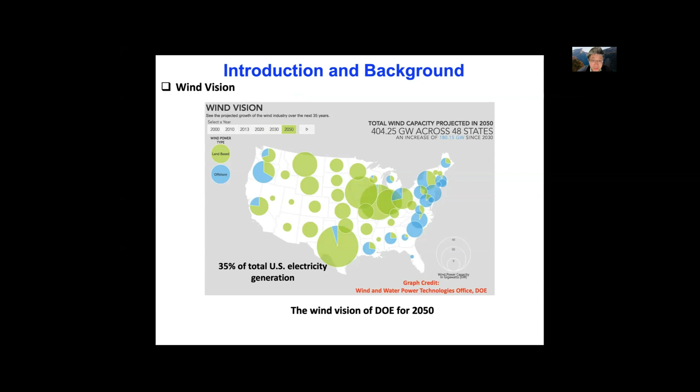From the water side, we are also very promising. Here I extracted some statistics from the DOE report. The length of the US coastline is more than 12,000 miles, and each year the average tide and wave energy is about 2,100 terawatt hours. If we only harness 20% of this amount with 50% conversion efficiency, we would be able to generate 7% of the total US electricity consumption each year.

Another attractive fact about wind and hydro energy is that if you look at the energy distribution and the population distribution in the United States, you would see that they are pretty much overlapped. This means that renewable wind and renewable hydro energy can provide power where we need it, and we can significantly reduce energy waste during electricity transmission by developing these energies.

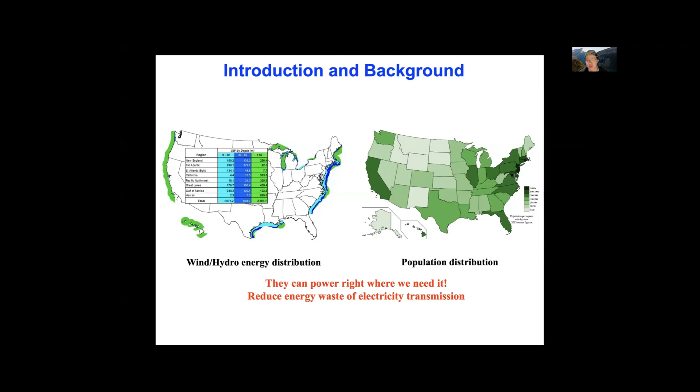If you look at the evolution of wind energy and tidal energy technology development, you will see that the energy harvesting structures are becoming bigger and bigger and more complicated in terms of geometric design and material design. For example, if you take a typical offshore wind turbine, you realize it involves very complex geometry and materials, and the blade diameter can easily reach up to 120 meters. This means the cost of each turbine will be very expensive, and experimental tests are becoming more and more expensive if you want to study their performance and energy generation efficiency.

As a result, high performance computing is becoming indispensable. However, this is very challenging. The first challenge is that the energy harvesting structures are very complicated — they have a very complex shape, they are big, and they have complex distribution of material properties. The structural components are in relative motion, and this gives challenges for CFD and FSI simulation.

The second challenge is that these structures are subject to very complicated loading conditions. Here I use an offshore floating wind turbine as an example. It's subject to gravity, and it's subject to high Reynolds number turbulent wind flows. It's also subject to ocean waves, so you have very strong components of those loading conditions.

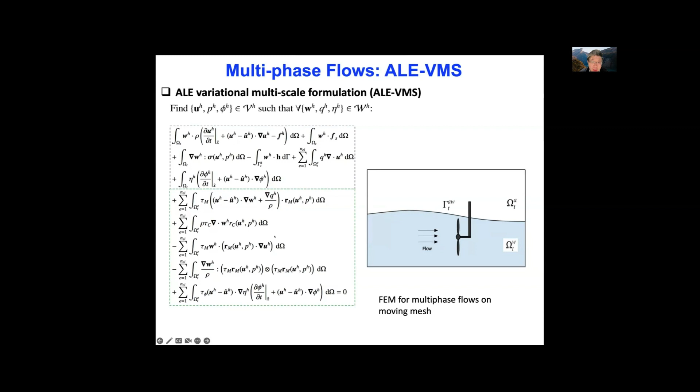First off, for fluid dynamics, we have developed a finite element method formulation for multi-phase flow on moving domains. This approach is based on the Arbitrary Lagrangian-Eulerian approach. In order to solve the multi-phase flow, we couple the Navier-Stokes equations with the level set method such that we can track the air-water interface. Then we use the variational multi-scale formulation as a large eddy simulation model to handle the large Reynolds number turbulence.

And for structural dynamics, we're using a new technology called isogeometric analysis. For some of you, you may know that in structural mechanics or solid mechanics, finite element method dominates this field. However, there is a huge gap between computer-aided design and the finite element method.

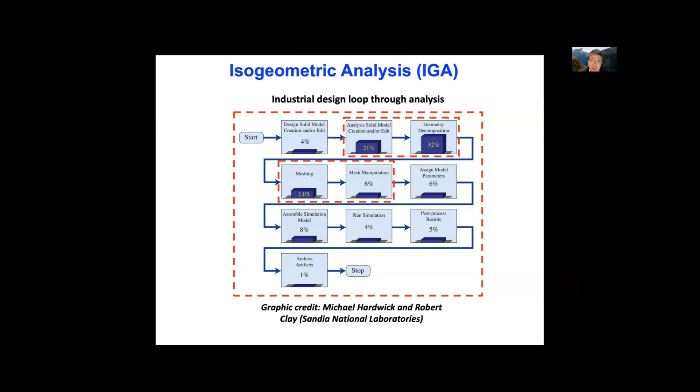In computer-aided design, typically you use non-uniform rational B-splines to represent geometry. However, in FEM, what you typically use is Lagrangian polynomials. As a result, in the industrial structural design loop through analysis, a lot of time is spent converting the CAD model into an FEM mesh that can be handled by finite elements. For very complex structures like wind turbines, this conversion process can take very long, typically accounting for more than 80% of the total design loop through analysis.

So in isogeometric analysis, we feel that we can integrate design and analysis. We employ the same functions used to describe the geometry of the turbine and directly use them in the structural analysis. This example shows how we use isogeometric analysis to do design, structural analysis, and visualization. During the process, no mesh generation is needed. We directly use the non-uniform rational B-spline representation for design, analysis, and visualization. And we coupled isogeometric analysis for structural mechanics with multi-phase CFD in order to do fluid and structural interaction analysis.

So let me show you what you can do with this computational fluid and structural interaction framework. These are just several case studies. First of all, you can use the framework to study the interference between turbines in a wind farm.

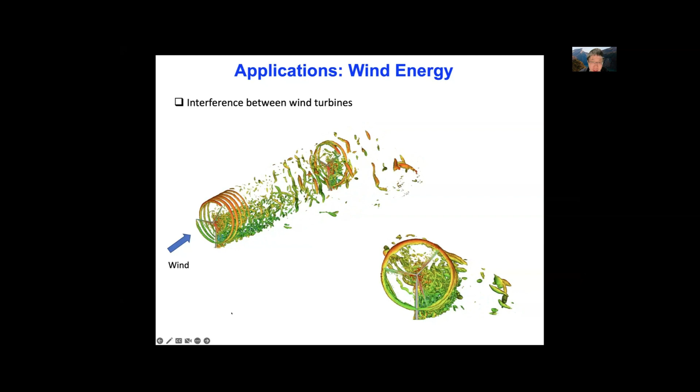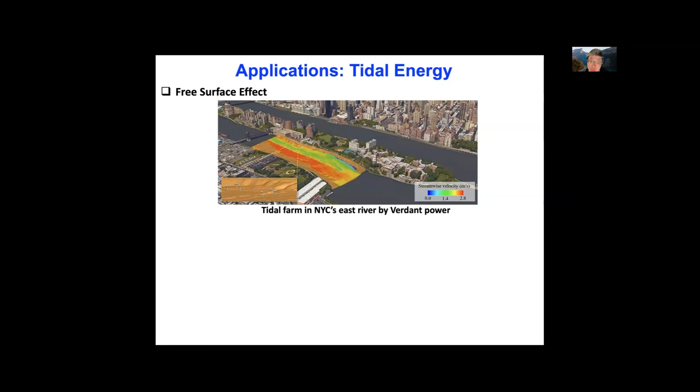We can also use this framework to study hydro turbines. One important issue in tidal energy is the free surface effect, because typically you install turbines in shallow waters in rivers. Many experiments have indicated that free surface has a significant impact on tidal turbine performance. However, few people had studied this. So in 2016, we did the first study of the free surface effect on tidal turbine performance.

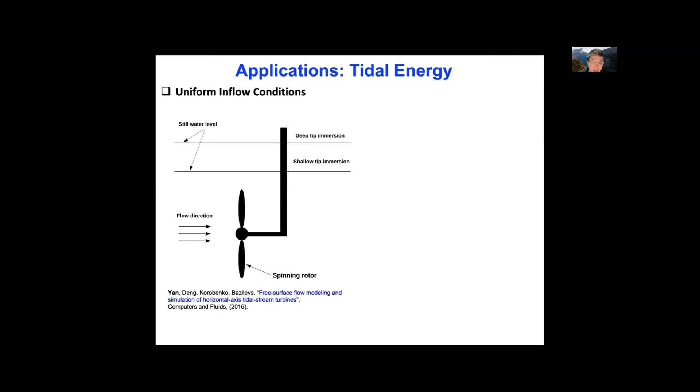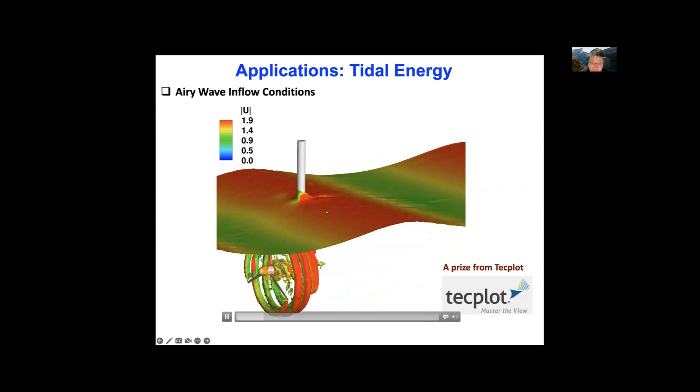In addition to uniform inflow, you can add waves. This is a free surface simulation of this tidal turbine subject to Airy wave inflow conditions. You can see the interaction between the turbine and the free surface flow, how the free surface deforms, and how it interacts with the tip vortex due to the rotation of the rotor. This visualization won a prize from Tecplot in 2017.

Because you have waves, the thrust coefficient and power coefficient experience very strong fluctuations. However, if you average the coefficients in the fully developed stage, you still see that as you immerse the turbine deeper, the coefficients increase. This indicates that for both uniform inflow and Airy wave inflow conditions, free surface has a negative effect on tidal turbine performance.

This conclusion is not surprising. However, you have to quantify it. What about turbine performance in terms of realistic wave conditions? In order to investigate the free surface effect in those scenarios, you have to perform rigorous calculations.

Before I end my presentation, I want to highlight one more application. So we already know, based on my previous calculation, that for the uniform inflow deep immersion case, free surface doesn't have an effect on a single turbine configuration. Here we want to know, for the deep immersion case, if we have multiple turbines, does the free surface still have an effect?

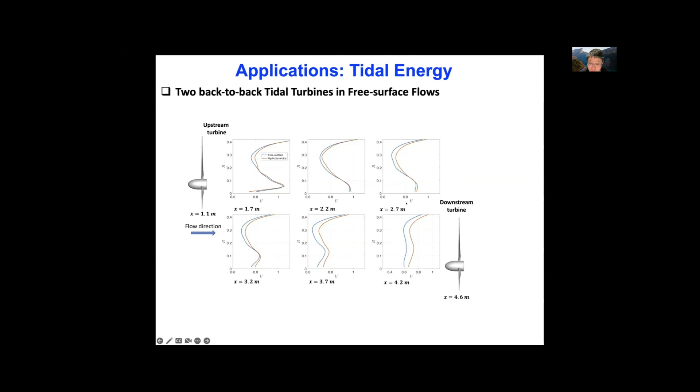However, for the downstream turbine, because of the free surface and tip vortex interaction, free surface starts to have a significant effect, because the water speed predicted by pure hydrodynamics is significantly bigger. As a result, the power coefficient and thrust coefficient predicted by pure hydrodynamic simulation are also bigger than those of the free surface flow simulation.

So with this, I will stop my presentation.

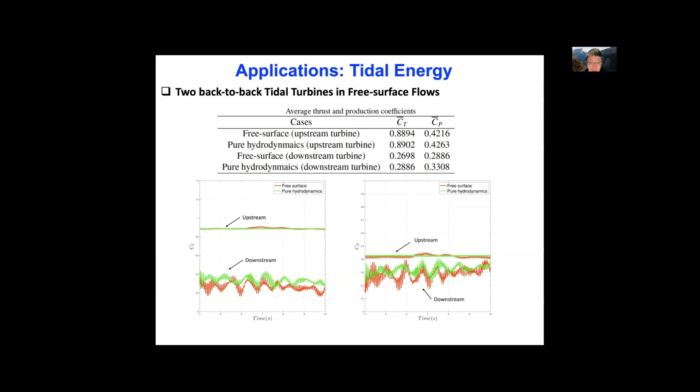Sure. I see the CP reach almost the theoretical limit in the slide before. Is that because it's just transient, or? You mean this one, this slide? No, the previous one. This one? No, next one. Next one, this one? That one. Oh no, some of that. Yes, this one — you see at time 0.7 you almost reach the theoretical limit.

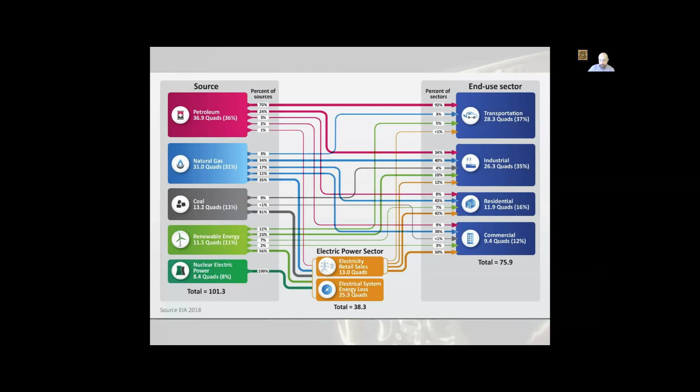About 38% of all the energy we are able to generate, we lose, either during transportation or during storage. We really need, if we are going to have a more efficient world in terms of energy, to keep an eye on how to save energy. And that starts in our house.

That means that we need to spend a lot of effort, money, and resources on air conditioning. This shows that there is a very big increase in electricity demand for air conditioning. Keeping fresh a house, a school, an office is mandatory in many places around the world, either to keep it cool or keep it warm, depending on the season of the year.

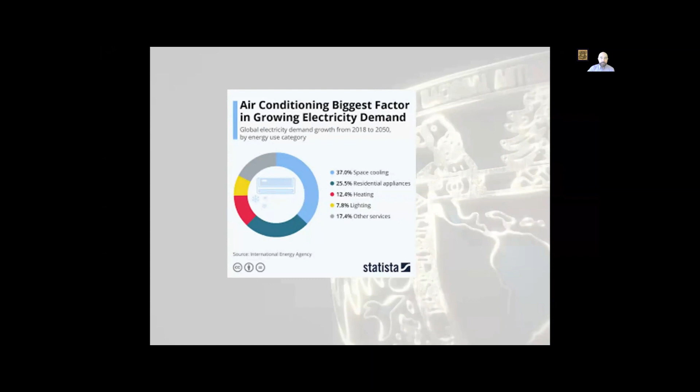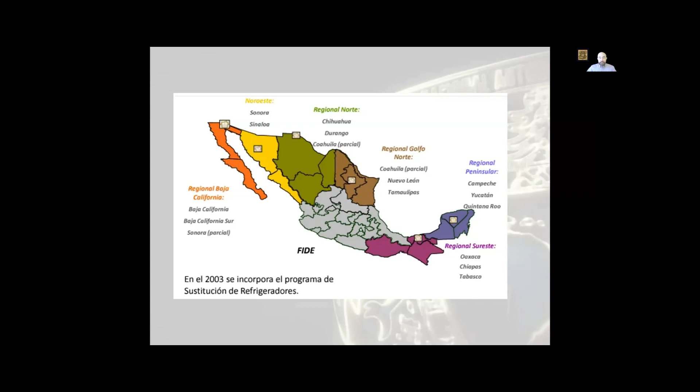We already have patents in the United States and in Mexico, and we have a program with a federal agency called FIPATERM, which is a fund for thermally insulating houses all over Mexico. They operate in the hottest, warmest areas of the country: the northern part near the border with the United States, and the southern part, areas which right now can reach up to 40 degrees Celsius every day.

The other thing I'd like to tell you about is that, as you know, the solar energy market is one of the fastest growing in the world, as you can see here in different regions: Europe, North America, China, the Middle East, and so on and so forth.

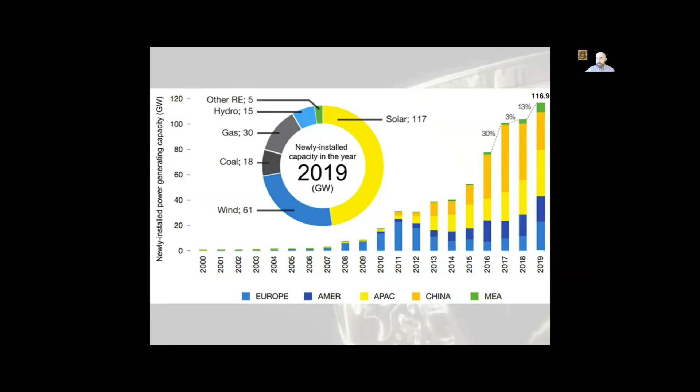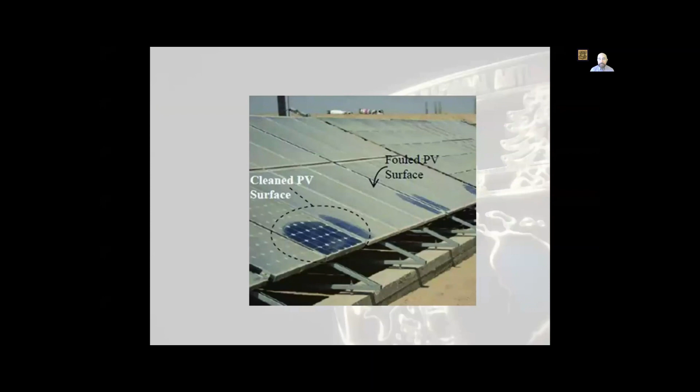This means that once you install a solar cell, within a few months it gets covered with dirt, and the efficiency decreases very dramatically. This is a review on how solar panels lose power due to soiling, and this could be up to 50% in less than a year. So this is a very big problem.

You could say, okay, we can just clean it. But in some areas in Mexico, they have found that it's cheaper to put up new solar panels than to clean them. In order to solve this, what we did was develop a nanotechnology coating which is self-cleaning.

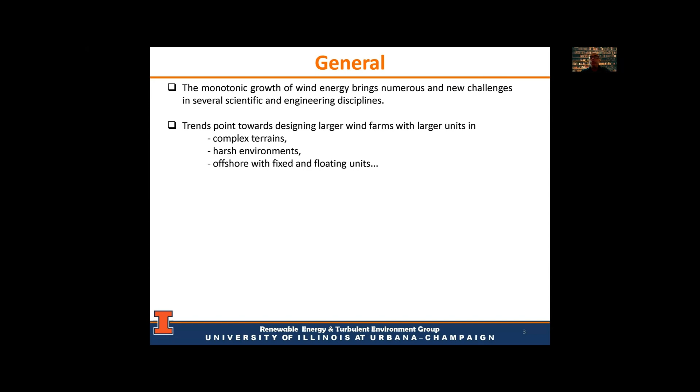In general, we are having larger and larger wind turbines and wind farms, with many new challenges from scientific and engineering disciplines. Trends point towards setting these units in complex terrains, harsh environments, and offshore environments with fixed and floating units.

We need to understand the role of the atmospheric boundary layer within wind farms at different scales, the flow structure interaction—particularly in floating offshore units—meteorological effects, wave dynamics, turbine-turbine communications, and the aerodynamic loads, especially for those monster turbines that are now 5 to 10 megawatts, the larger, very huge wind turbines.

Okay, so the common approaches from the measurement standpoint: we have laboratory experiments and field campaigns. In laboratory experiments, we have many advantages, which include control setups, repeatability, and cost usually is an advantage. We can get scientific value, we can do optimization, and we can couple different effects like topography, flow, and turbine interaction.

But there are many disadvantages as well in laboratory experiments. We have to ask, is the model representation of the system representative of the field scale? So we have scaling issues. We have limited aerodynamic loads, and cost is an advantage but could also be a disadvantage. Usually the blade scale aerodynamics is pretty limited, and the Reynolds number is much lower than what we see in full scale settings. So those are examples of laboratory experiments.

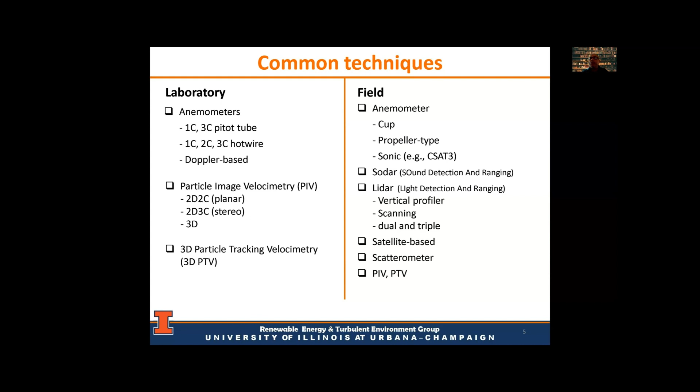In the field, however, we have complementary tools. Most common are anemometers—single point, cup propeller type, sonic anemometer. We have Sodar, LiDAR in different variations: vertical profile scanning, dual and triple scanning. We have satellite-based measurements, scatterometer, and we can do particle image velocimetry at super large scale. But we need to see the flow. That is pretty challenging, but conceptually is possible.

So we have considerations between laboratory and field scale. We have to account for, evaluate, and assess what temporal and spatial resolution we need to achieve for a particular project or development, as well as accuracy and range. So let's see a little bit.

So at the field scale, what we want, what we need, is to get mean flow, mean velocity. We want to get higher order statistics, let's say second order statistics, to assess flow variability, the variance. And then hopefully we would like to know how scales interact—scale to scale interaction. So we would like to assess and capture the turbulence dynamics, the structure of the turbulence.

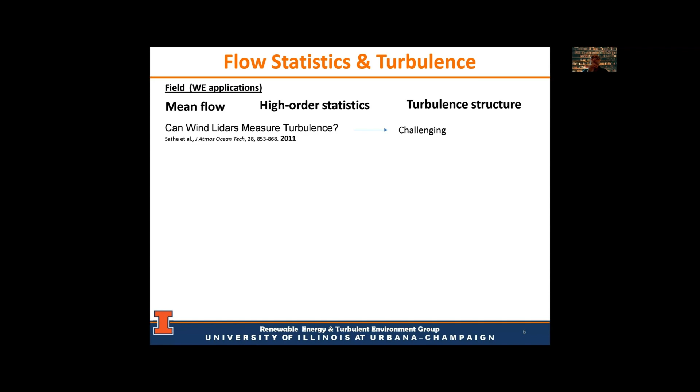So what do we have? Can we measure mean flow? Yes, anemometers can measure that. But can we measure turbulence? Well, a review paper from over 10 years ago shows progress, but it's slow. A gold standard technique is LiDAR. Can LiDAR measure turbulence? Up to some extent. It is challenging to get very accurate data.

And can we use other techniques? Yes, we can use other techniques, and recent studies show that we are approaching being able to estimate just the second order statistic in a reasonable way.

So in general, for field scale, we can measure mean flow. We are doing substantial progress in getting higher order statistics towards measuring velocity fluctuations. But in describing the turbulence structure, we need more research and development. It's still a question mark at field scale.

On the other hand, at laboratory scale, we can measure mean flow, we can measure higher order statistics, and we also can measure the turbulence structure. However, we are bounded by scaling in laboratory settings. We are bounded by that.

So let's discuss a little bit about this scaling issue at laboratory scale. Several years ago, we showed that at laboratory scale, the representation of wind turbine aerodynamics and wakes—not the wind turbine blade, but the wakes of the wind turbines and turbine-turbine interaction—becomes Reynolds independent at values that are representative and possible at laboratory settings. So we have that without problem, we can do that, it's representative. And also a study by Wong et al.

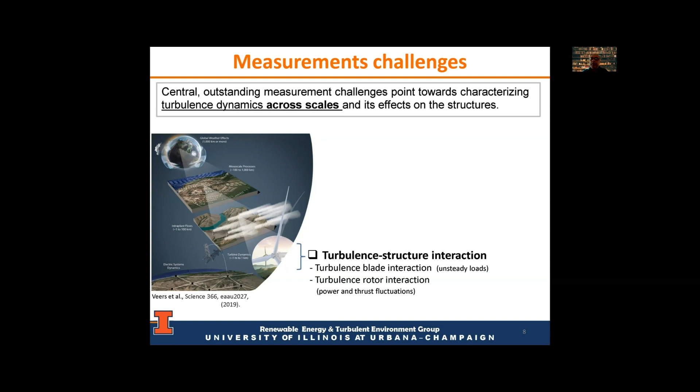Those are at small scale, particularly very relevant to characterize. Then at larger scale, we have to account for turbine-turbine interaction, to understand, to quantify, to model, and to reduce unsteady loading.

And allow advanced controls. Also, when you have wind farms, we need to understand this inner-outer flow interaction to replenish turbulent energy within the wind farm.

And also, of course, to control the turbine wakes.

And then at a very large scale, at meteorological scale, we need measurements as well, because we want to assess what are the local effects.

In the sense of topographic effects, sea effects, local weather effects, and air-sea interaction.

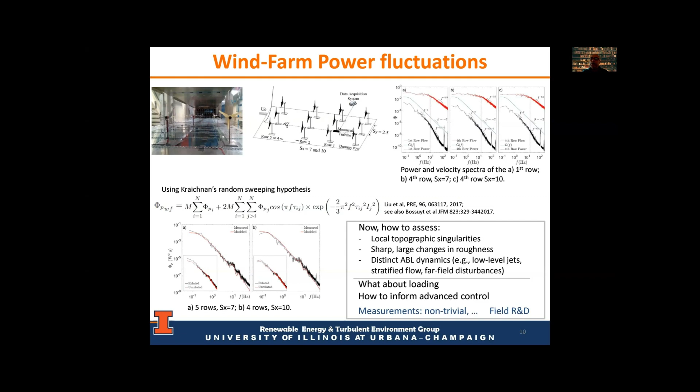We can complement these models with measurements and then evaluate them. And then, what we have recently done is explore offshore topography and turbine-turbine interaction. Thank you.

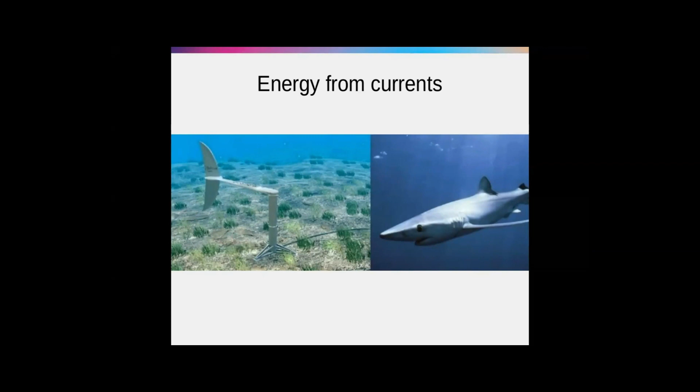So using this principle, we can think of devices, maybe inspired by nature, that can extract energy from a fluid, from a current. There are passive devices that transform the oscillating motion into rotary motion using mechanisms like this one.

I'm showing here. There are others that use, for example, a single airfoil like this one, which is rather big, as you can see from the picture.

I have to say that most of these efficiencies, in the case of experimental and also numerical studies, are obtained with tandem configurations, which means that there is more than one airfoil.

There are two notes I want to tell you about here. One is that most of the numerical studies are done with prescribed kinematics. Prescribed kinematics means that we move the airfoil in the simulation the way we want. Most people use a sinusoidal trajectory, both in heaving and rotational motion of the airfoil, and then calculate the efficiency with the forces and the velocity.

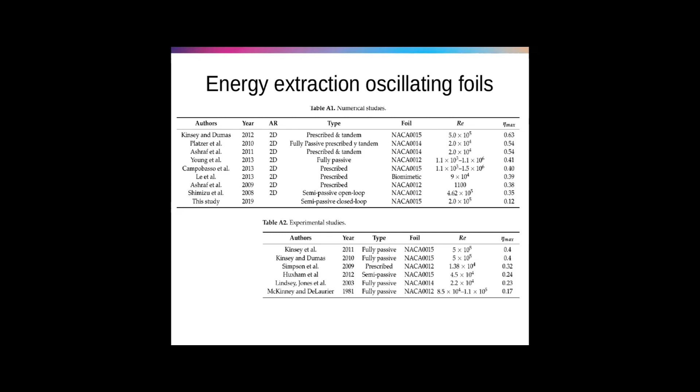It's facing the flow with an angle of attack theta. This angle of attack will produce a lift force that will drive the airfoil up and down, and we will be able to extract energy with a generator, which can be modeled, in the simplest way, through a damper.

The angle of attack can be changed using an actuator, a torque applied at the center of rotation of the airfoil, maybe through a motor or some actuator. This scheme is supervised with some measurement. For example, we can measure the angle theta and the velocity, and this supervising system will tell us if we are doing the extraction correctly, and if we are not, then we can correct the motion by actuating through the torque. So this is a closed loop controlled system.

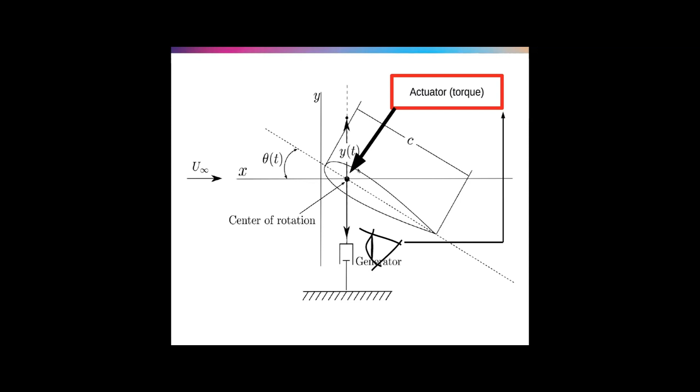Here, the airfoil will be moving according to Newton's second law of motion. So we are considering here the fluid structure interaction.

We have to take into account that this thing is moving up and down, and the relative angle with respect to the flow will vary, but that calculation can be done very easily, so that's not a problem. So Newton's second law of motion will give us the equations that model this interaction. Here we can see that mass times the acceleration equals the summation of forces. Same thing with the torques and the angular motion, where instead of mass, we have the moment of inertia.

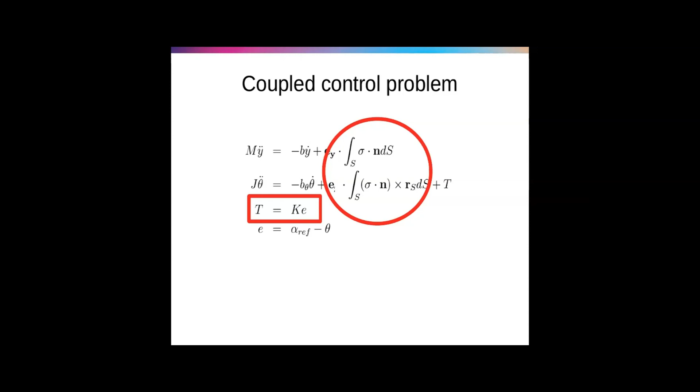Okay, so how did we do it?

We carried out 2D simulations using an open source code called OpenFOAM, which allowed us to modify the code and carry out the closed loop controller, which was a proportional controller, the simplest controller we could think of as a first approximation.

OpenFOAM can have deformable meshes, and this characteristic allowed us to move the airfoil the way we wanted, up and down, and modify the angle of the airfoil. Note that the resolution of the mesh must be very fine near the surface of the airfoil.

So important variables, there are many important variables here: the fluid characteristics, rho, mu, viscosity, the density, the mass of the airfoil, the moment of inertia, and that results in 8 dimensionless variables. So this is a very complex problem.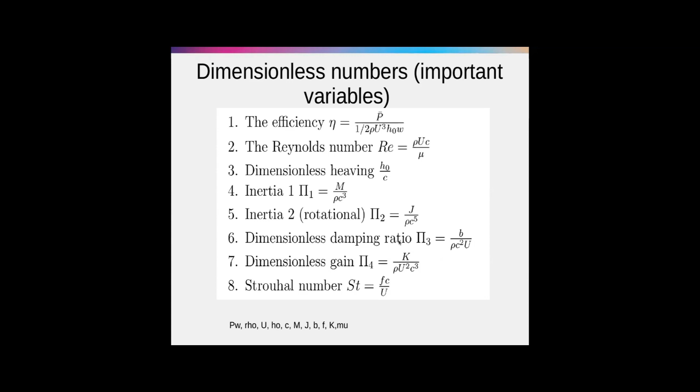Some of these dimensionless numbers: the efficiency, the Reynolds number, a dimensionless heaving where h0 is, let's say, the maximum distance we go up or down, the range, an inertia number, a rotational inertia number, damping ratio, and this number which represents the gain of the controller.

So we can calculate the efficiency, which in this case we plotted against another dimensionless number that represents the force of the generator divided by the force of the actuator, which is represented by the gain K. So if the generator is too stiff, this torque would be very high, and maybe it could move very slowly, so that could affect the efficiency, and vice versa. So there's a commitment we have to make.

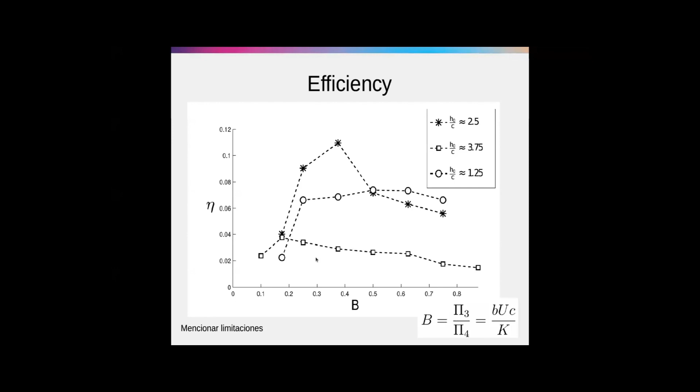We did many tests with different dimensionless heaving ranges, and we obtained efficiencies of the order of 10%. For example, here we see a maximum. We plot the efficiency in terms of these new dimensionless variables.

So the lessons we learn are, well, there are many lessons. I would consider other configurations or improvements, like a passive turnaround of the foil at the end of the range, which would save a lot of energy. Control energy can be large in those parts of the cycle. The deforming mesh has many limits, and the most important thing is that the lift coefficient and torque coefficient are very complex.

Time. Oops, sorry. So let's wrap up now. Yes, I'll wrap up very quickly.

So the lift coefficient and the torque coefficient have to be very well estimated in order to have a good control law. In fact, they show hysteresis cycles. They are very non-linear. So our efforts are now on estimating correctly these coefficients in order to propose better closed loop control laws and obtain better efficiencies, and optimize here.

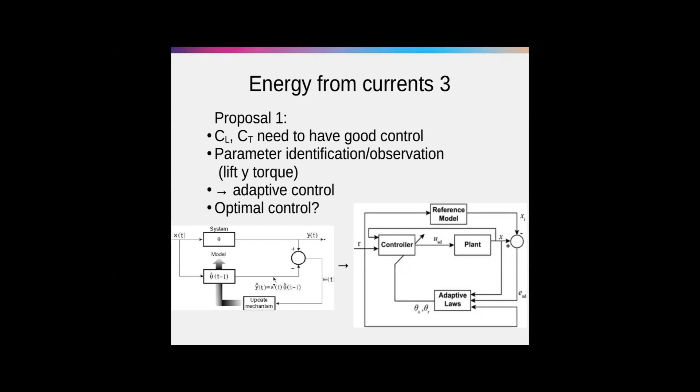I wrap up here, and I'll leave you with this. Thank you very much.

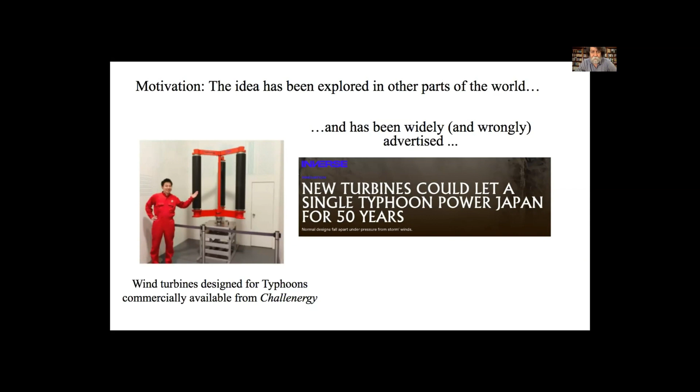And as usual in the media, you can have spectacular comments on this. For instance, they say that a single typhoon, as they call it in Japan, can give the energy for 50 years. That's a crazy and very inaccurate statement.

Let's try to analyze a little bit from the scientific point of view. What are the real possibilities? What are the real conditions under which we can extract energy from hurricanes?

Okay, well, first of all, what is a hurricane? Essentially, a hurricane is a consequence of the thermodynamic disequilibrium between the atmosphere and the ocean. And a typical scale of a hurricane is...

A typical scale of a hurricane is about 1,000 kilometers across, and it has an azimuthal velocity, as we have seen, of about 60 meters per second, even though up to 80 meters per second have been recorded.

Now, this is a big statement. This air velocity is huge, but if we take a closer look at the structure of the hurricane, we will discover that this is not so simple. Essentially, the structure of a hurricane is an upward stream of air that goes up all the way to the stratosphere, and then it comes down, exchanging energy by taking heat energy from the ocean and releasing it in the upper parts of the atmosphere.

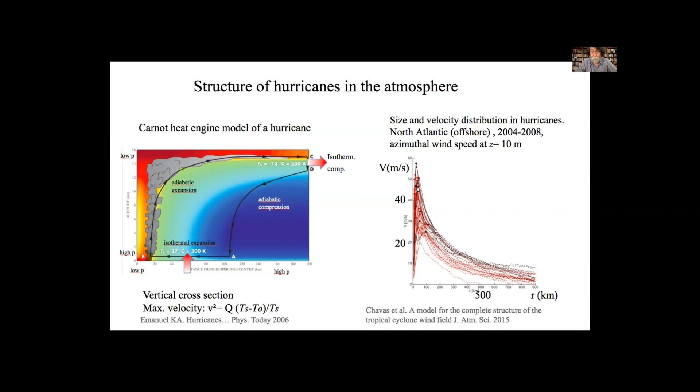Now, the azimuthal energy, the energy from the azimuthal motion, is concentrated in a region that is very close to the upward going current, and it does indeed reach very high values, 40 meters per second, but it is concentrated in a region that is about 100 kilometers. So, of the whole structure, there is only a very limited region where the density of the energy is high.

Let me just mention that if we consider the whole energy of the hurricane, it would be very interesting because it is comparable to the energy powering Mexico's power consumption. But again, let's look at the possibilities of efficiently collecting the energy of hurricanes on land.

First of all, we're going to explore three possibilities. First, let's explore whether we can catch the energy on land. Well, first of all, if we want to catch the energy from a hurricane, assuming that we are on land, one of the difficulties—let me talk about this a little bit in detail.

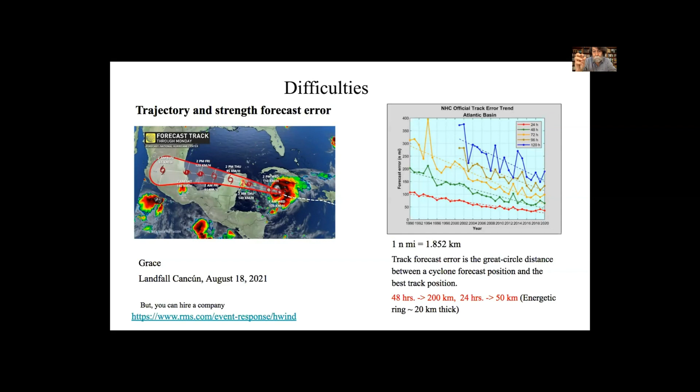One of the most important difficulties is that we don't really know where the hurricane is going to go. For instance, I remind you that the trajectory of a hurricane from the weather services is a trajectory that widens as it goes into the future. So we don't really know where it is going to land. So if we wanted to catch the hurricane on land, we would have to be running around using presumably roads or rail tracks to actually go to the place where the energy is.

This is not the only difficulty. We also have the problem that we don't actually know what is the strength of the hurricane. And even if we are lucky enough to be in the right place at the right time, we will have to solve the problem of energy storage, because the hurricane is very short-lived—about 16 hours. So we will have to be very careful in storing the energy very, very efficiently.

Okay, even though this will be very difficult, there will be many challenges. Nevertheless, as I commented before, there is technology that has been developed by a company, Challenergy in Japan, and they claim that their device has been able to catch the energy of a typhoon, about 30 meters per second wind. But it's very expensive. If you want to try your luck, you're welcome to buy one of those for $250,000 US dollars.

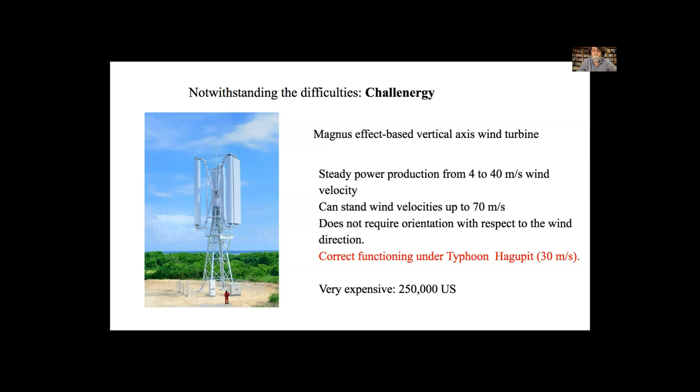And also, as we said, you will have to be running around to catch the energy. Now, what happens if, instead of being on land, we are on the sea, in particular in the Gulf of Mexico? This would be a very interesting idea because if we talk not only about hurricanes, but also all the tropical depressions that occur on sea, then we have a much more numerous possibilities. Just to give you an idea, I'm showing you the different trajectories here in the nearby region of the peninsula of Yucatan.

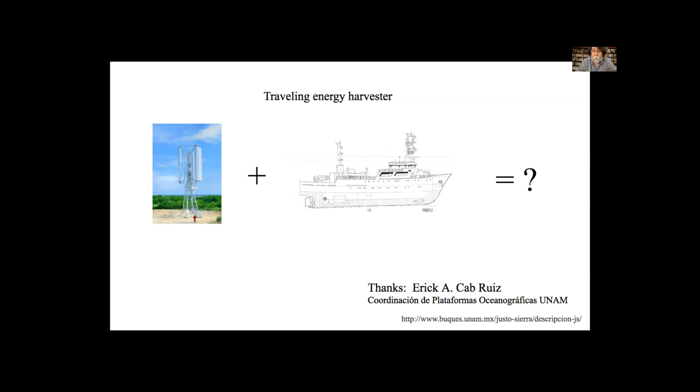Now, how do we catch the hurricane energy on land? What happens if we take a very robust wind turbine and put it on a boat, just to run around and try to catch the energy? Well, this is not such an outlandish idea. There are some companies that actually build structures very similar to the ones needed, based on the Magnus effect, on ships. So this would be interesting, and let's see whether we can fulfill the conditions.

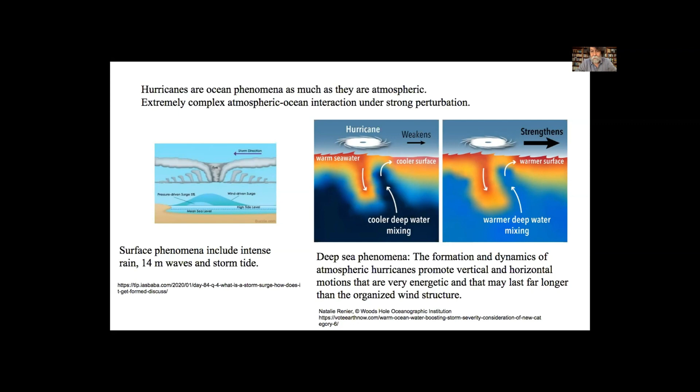Now, since we are on the sea, perhaps we can also try to get energy not from the air, from the wind, but also from the currents generated by the hurricanes. This is an enormous source of energy, and what we're thinking right now is that this would be the best way to go, to try to extract energy from the atmosphere and from the ocean in the passing of the hurricane. Also, thermal energy, which I haven't had time to talk about, is available.

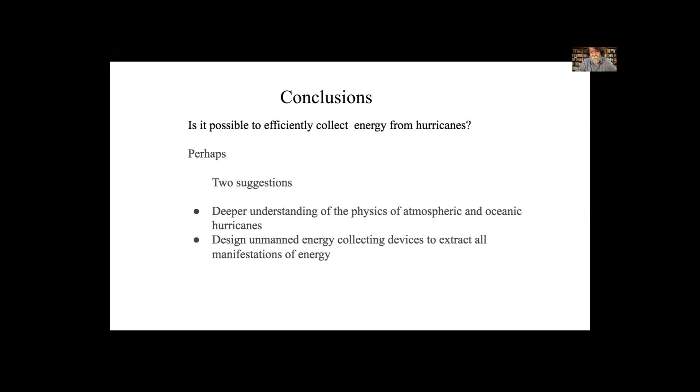Good. My conclusions are: let's try to answer this question: is it possible or feasible to efficiently collect energy from hurricanes? The answer is perhaps. Our study indicates that we need a deeper understanding of the physics of the atmosphere and ocean, and also we have to design an unmanned collecting device to extract all manifestations of energy. And this is the end.

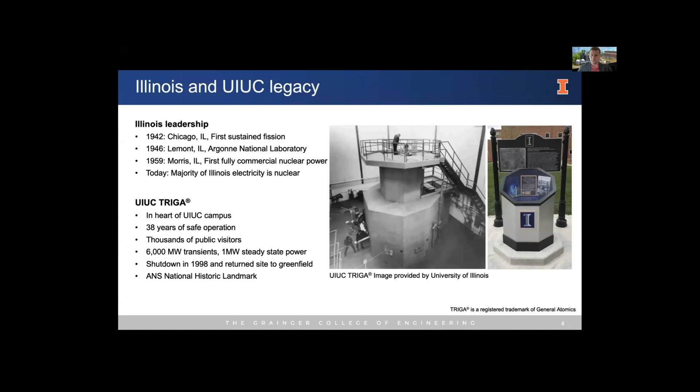So we're planning on leveraging Illinois' leadership in nuclear, the University of Illinois' experience with nuclear. A lot of folks who were here for the TRIGA reactor are still involved. And so this gets to the Illinois Microreactor Demonstration Project, which is what I work on every day.

As part of our project to deploy a microreactor on campus, we have two core missions and a cross-cutting mission. As a university, one of our chief missions is going to be education, training, and engagement.

So education is using this as a teaching aid. We want to train reactor operators, which—as this will be a commercial unit—we'll be able to do. We're also very actively looking at cross-training.

So in the future, if carbon reduction continues with the momentum it has, and even picks up momentum, we'll be looking at displacing coal and natural gas plants, where a lot of very skilled people work. We're looking at how we can leverage that, keep those people employed, and also maintain that experience with as little retraining as possible.

The other core mission is research and development. The paradigm of nuclear has to shift for us to be able to operate more flexibly in the more diverse grid of the future, and to realize some of the business plans that are proposed. We will be in a unique position to perform that research and development.

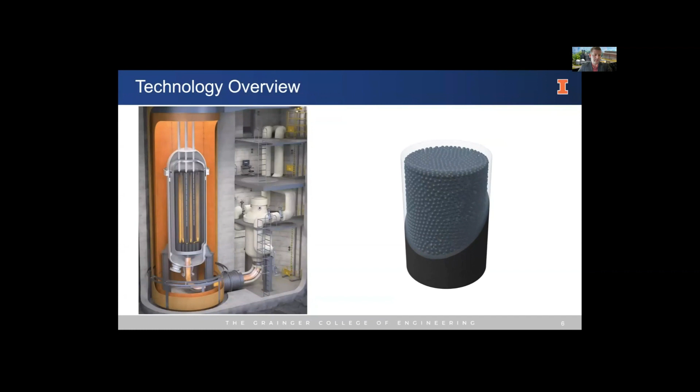The geometry of the core can be shown over here, where it's basically solid blocks of graphite with small fuel elements embedded. And you go to smaller scales—the point of this, without going into too much technical detail, is that as you're looking at the macroscopic core, you're looking at many barriers of protection that keep the radioactive material from entering the environment.

So this has been designed on decades of experience on how to keep reactors as safe as possible.

As part of our forward-looking research, we're looking at how to operate these things more efficiently, how to use fewer operators without compromising safety, and how to exploit other addressable markets.

I pulled this particular example because of the context of this talk. Renewables are clearly a growing part of the energy portfolio everywhere, and people are aggressively looking to expand it.

I see new neighbors every day putting up solar panels, which I'm very excited to see. We have solar farms nearby, wind farms nearby. It's very exciting, and nuclear has an opportunity to be a part of this and provide some critical grid stability without increasing carbon emissions.

We're looking at how we can design the operational paradigms to enable that. Storage is a critical piece of that.

The University of Illinois campus has a very diverse grid in terms of both energy users—we use a lot of steam, a lot of electricity, we have supercomputers—and a diverse energy generation portfolio. We have Abbott, which is a fossil fuel plant.

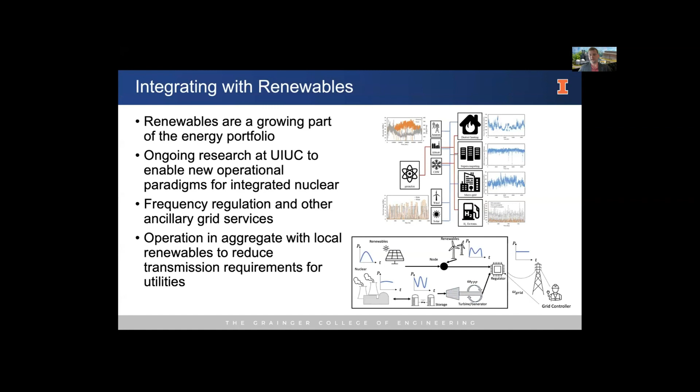We also have on-site solar farms, and we have a wind power purchase agreement. So we have a mix, and we have a lot of data on all of these sources and demands that we are using to develop operational models. I'll wrap up there.

The thoughts I'll leave you with: this is an exciting time in nuclear. We see that there's a really unique opportunity to integrate with the grid of the future, which includes lots of renewables. And we think Illinois is in the right place to see this through.

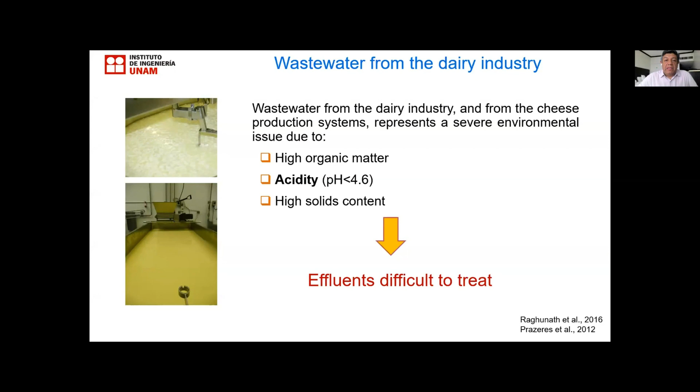But there is a problem, in particular with the acidic cheese whey. When the cheese is fabricated, we have two types of cheese whey.

The sweet cheese whey is at neutral pH, and this is valorized to produce food for animals. But the acidic cheese whey has a problem, because when it's neutralized to put in an anaerobic reactor, it coagulates.

So it's a very big problem because it cannot be treated directly, and some actions have to be taken.

For that, we implement—this was a call made from an industry to treat the wastewater, of course. So we can implement two-stage processes.

In the first stage, we obtain hydrogen or medium chain carboxylic acid, and in this first transformation we hydrolyze all the compounds present in the effluent, transforming them into acid.

That acid can be very easily neutralized and put in the methanogenic reactor.

One additional issue is that in the first stage we can obtain hydrogen. So in the first stage we obtain hydrogen, and then methane.

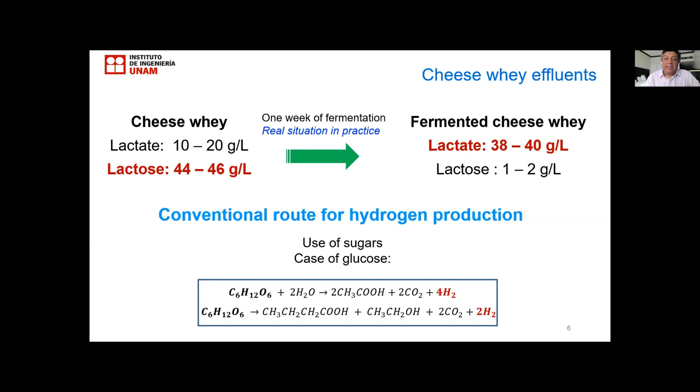So this is the objective of this research by my PhD student: to evaluate alternative pathways using lactate and acetate as substrate for hydrogen production using acidic cheese whey.

For that, we use cheese whey from a factory in Querétaro, fermented acidic cheese whey. We obtain this effluent right after the cheese is fabricated. As in the literature, everybody assumes what it's going to be in practice, but it's not. We use the fermented acidic cheese whey, which is the real effluent we are going to obtain when we want to treat this type of wastewater. So we use these two: the theoretical so-called acidic cheese whey and the fermented acidic cheese whey, which is the real effluent we will have in practice.

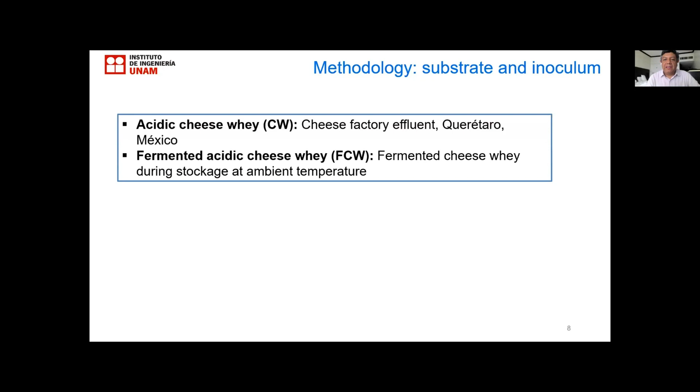How do we do that? We have to adapt an inoculum that can be used in a practical way. We use granular activated sludge from an anaerobic reactor, this black one, granules of microorganisms, principally archaea, and we adapt these into hydrogen-producing microorganisms. How do we do that? After 2 weeks, maintaining acidic pH and very low hydraulic retention time, we wash out all the archaea present. We only use the skeleton of these granules to promote growth of the hydrogen-producing microorganisms also present in this original inoculum.

The goal here was to stop the methanogenic activity, of course. We worked with this in a lab-scale reactor with this parameter: an expanded granular sludge bed.

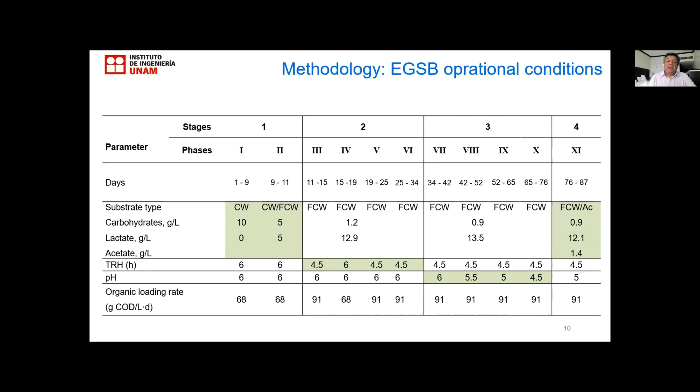I'm not going to go further into the details, but I want to show that we ran the reactor for about 3 months and studied several parameters. The first stage was the acclimation of the sludge, as previously explained. We used the cheese whey as it comes from the factory just after fabrication, and the fermented cheese whey, in a 50-50 proportion.

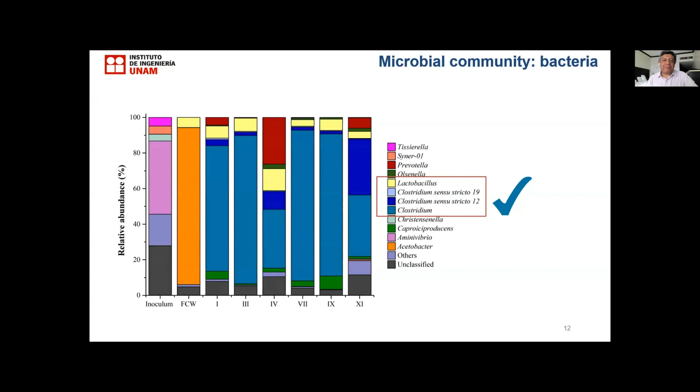So finally, the presence of lactate-producing bacteria has been said to be detrimental for hydrogen production. However...

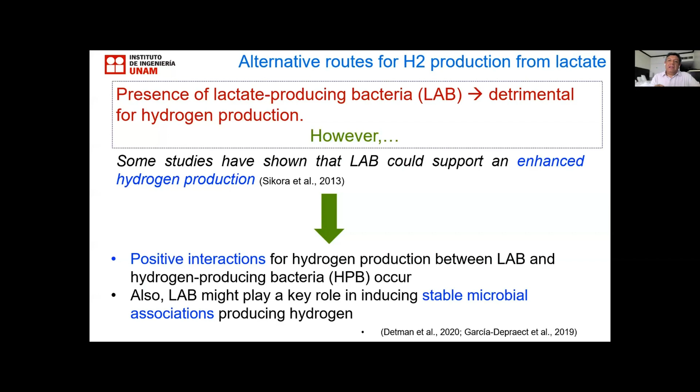Some studies have support that we can see that it is enhanced when these two types of microorganisms are present, that is lactic acid bacteria and Clostridium bacteria. So in conclusion, it was demonstrated that hydrogen can be produced using lactate as substrate, and when we add acetate, this productivity can enhance by three times. And of course, the presence of Clostridium and Lactobacillus positively correlated with hydrogen production and lactate consumption.

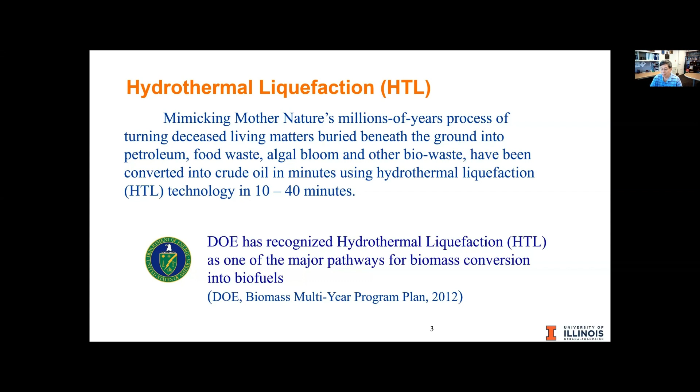So DOE has recognized hydrothermal liquefaction as one of the major pathways. This only happened in the past 10 years, but it really got a lift since 2017, six years ago, as HTL was recognized as a major pathway for biofuels. More recently, FAA and DOE set the target that by 2050 all our jet fuels are going to come from biofuel, renewable fuel. We are going to really replace fossil fuels by 2050. So only 27 years away.

So now what's at stake? The problem is we want to focus on recovering and reusing food and agricultural waste. It's challenging, but it's also promising. This is especially important in terms of sustainability and circular bioeconomy. In the US alone, we estimate 60.3 million tons of food waste alone, representing $161 billion in loss. We also have 77 million tons of collectible bio-waste annually from food systems. Those figures are from DOE and USDA's annual report.

That biomass is generally considered an expensive burden, such as in the collection and dumping phase. On the other hand, it is high in nutrients, carbon, and energy that can be recovered and made into valuable byproducts, such as transportation fuels and biobinders or other biochemicals. So our research hypothesis, or objective, is that waste biomass derived from those bio-waste streams can be converted via hydrothermal liquefaction into high-value bioproducts, including transportation fuels, biobinders, and nutrients that can be recovered for reuse in agricultural production, thus achieving the circular bioeconomy.

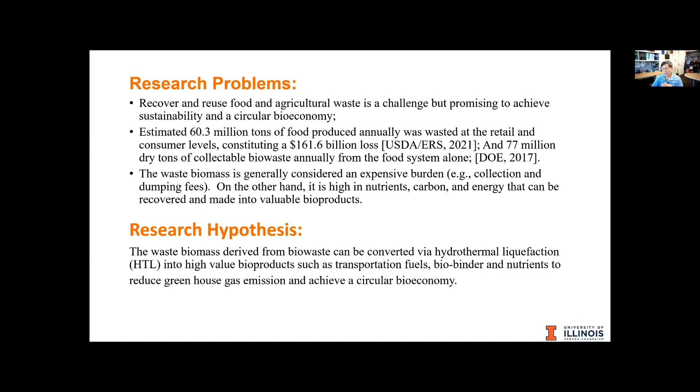So I'm going to use this example. This is ongoing research - I have two DOE projects dealing with food waste and municipal wastewater sludge. In this one, we target two types of food waste: one is a sort of restaurant waste, and the second is from a food processing plant. First they are homogenized, and then we do biochemical analysis, including proximate analysis and elemental analysis.

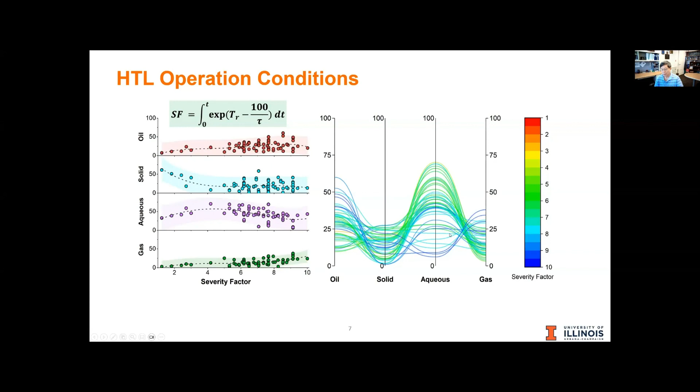After analysis, we do an array of lab tests to determine the hydrothermal liquefaction conditions, including temperatures, retention time, and solid content, etc., to determine the best or optimum operating conditions following the severity factors. The severity factor is a function of reaction temperature and retention time, used to see what conditions give us the best crude oil fraction. Through this study, we determine the operating conditions for our pilot reactor. Again, this is the high level overview.

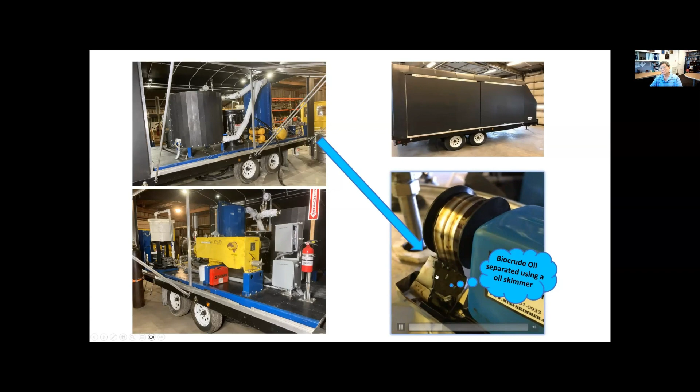At the end, the product is the biocrude oil. So this is at the end here, and this is the oil skimmer. This one in particular is from the food waste.

The oil stream can be further upgraded into different transportation fuels, in particular diesel and jet fuel. The heavy fractions could become biobinders for road pavement.

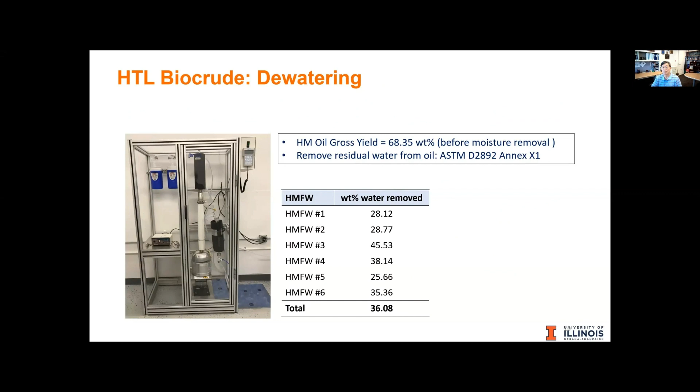For the crude oil part, we are doing an array of pre-treatments to upgrade it for transportation fuel. Here I'll show you a couple of results.

Our job is to take those light fractions, including the jet fuel and diesel fuel range, and upgrade it into jet fuel.

That's our goal, and my current project is focused on doing all this upgrading using different catalysts. We're also developing our own nano-sized catalyst in collaboration with chemical engineering and civil and environmental engineering.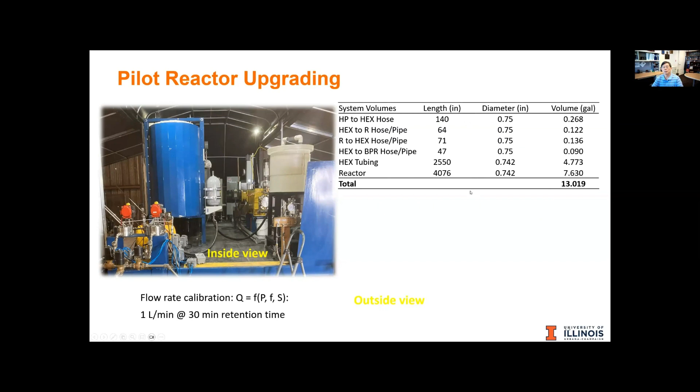Right now my group has this reactor we developed in collaboration with industry, sitting in my lab. This allows me to produce enough crude oils and wastewaters for downstream research, including upgrading and nutrient recovery.

You can see from the inside and outside view—this is last year's picture we took during the Army project dealing with algal blooms. This reactor has a capability for treating 1 ton per day.

So we can obtain enough crude oil for upgrading work. This project is funded by the USDA, and in particular we are focused on food waste and swine manure. The goal is end products focused on sustainable fuels.

Through this process, we treat bio waste, including food waste and swine manure, to get light fractions for diesel and jet fuel, and heavy fractions for road pavement. The wastewater we aim to use to grow vegetables like lettuce. So this is part of the circular bioeconomy.

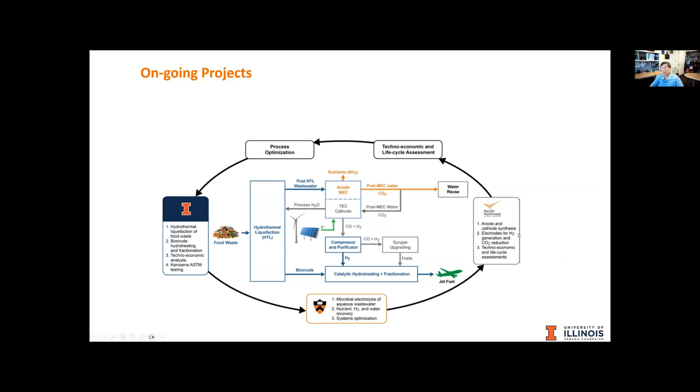Those are projects in parallel, and we're also now dealing with municipal wastewater sludge. Again, the approach takes the wastewater, converts it into crude oil, and then upgrades that crude oil generated from wastewater sludge into jet fuel and marine fuels.

That is ongoing—still in the research and development stage. But over the past 5 years this has become a really emerging hot topic, because we are aimed at replacing traditional fossil-fuel-based jet fuel. Our goal is that by 2050 we can replace jet fuels with renewable fuel.

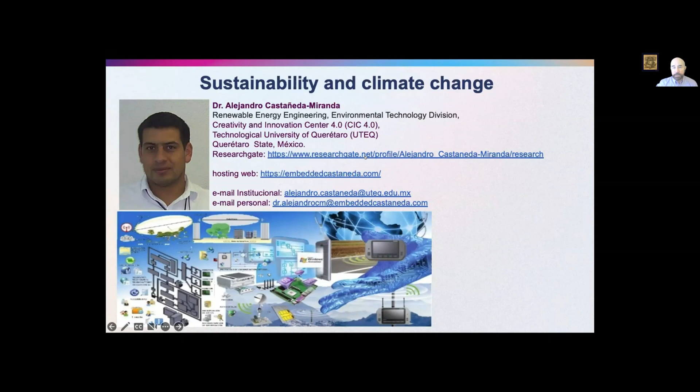We are currently producing a 100% 3D printed respirator for COVID patients, which will allow you to basically build your own respirator at home in case you need it. But before I start with the work, I would like to take the opportunity to introduce you to the Center for Innovation and Creativity.

This center was founded by the Technological University of Querétaro and the National Autonomous University of Mexico in 2016. This is the very first center of this type in Latin America.

It has had a very strong impact, not only in Mexico, but also in some other Latin American countries. We are now discussing the possibility of replicating this in Argentina, Peru, Colombia, Puerto Rico, and also Chile.

And last year, some authorities from University of Illinois, Urbana-Champaign, including Professor De Mejia, had the opportunity to visit this facility in Querétaro, and they can tell you firsthand what they think.

First of all, let me tell you why Querétaro. Querétaro is one of the smallest states in terms of size in Mexico, but it ranks among the top in terms of research and technology in Mexico.

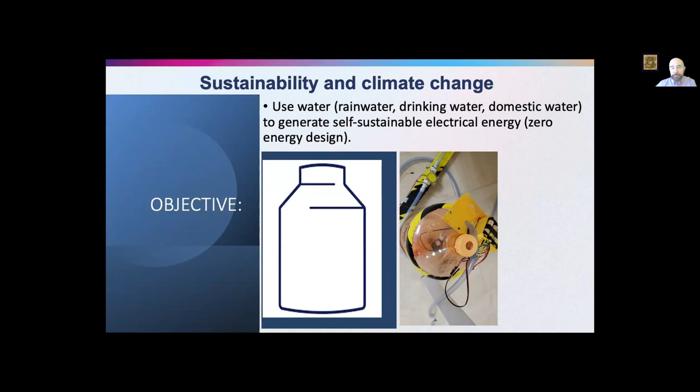Since this Center for Innovation and Creativity 4.0 has very good capabilities in state-of-the-art information technologies, Internet of Things, and embedded microelectronics, the idea is to produce a system which is fully automated and could be controlled through your mobile phone to produce water in a very simple way.

This is the simple idea. You have the deposit of water, and through pumps and different controls, you can replenish the container or obtain water from the container.

This water is obtained from recycled water, from the air, or from salty water. By obtaining it through an electrochemistry system included in the design, shown on the upper right hand side, we can obtain hydrogen to charge batteries at different levels, while controlling the voltage level, the cycling, and the current that is being produced.

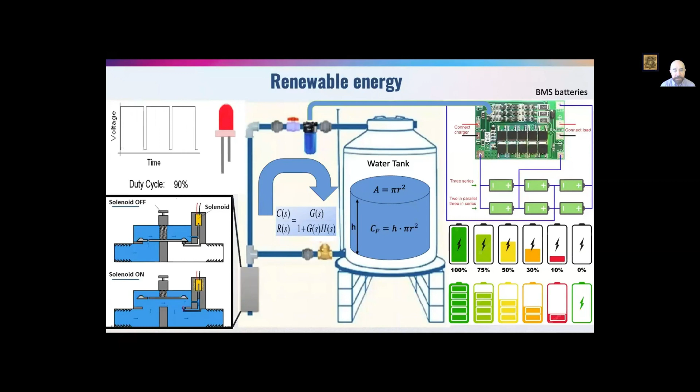The advantage here is that everything is fully controlled. It has state-of-the-art electronics. This is part of the design, some of the equations that control the flow. The system has artificial intelligence to control not only the flow and the different parameters, but also a system that can monitor meteorological conditions like humidity outside and inside, to make the collection of water and its use as efficient as possible.

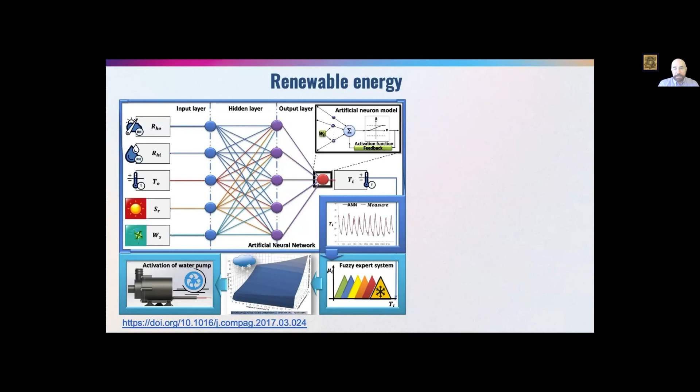I'm mentioning this because some of the work we have seen today, in particular Professor Germán Buitrón's, could take advantage of this fully automated system. We also have a system to predict weather conditions, including frosting conditions due to changes of temperature and humidity inside and outside, and to be able to control this basically.

As a conclusion, we would like to offer this system, which is working at the laboratory and prototype level, and share some of the results with interested parties to see if we can either apply the capabilities of artificial intelligence, Internet of Things, and embedded microelectronics to other applications, or see how we can expand and scale up this system. As for today, we have about 50 square meters of laboratory completely fed by this system in terms of energy and water. Thank you very much.

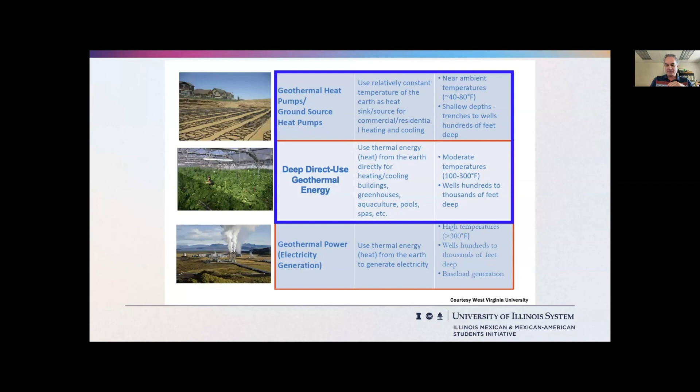We call this geo-exchange rather than geothermal because we're exchanging heat from the ground into pipes that we circulate water through. We're actually using the water as the medium to do the exchange of thermal energy.

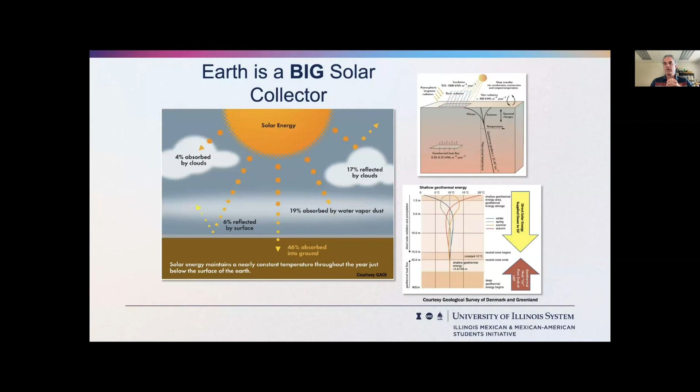The actual climate in the region is also relatively important in these systems, because you want extremes in climate. For example, in Illinois we have cold winters and hot summers, so you're always trying to change the temperature in the buildings to 22 degrees Celsius or 72 degrees Fahrenheit.

So if you can bring water up through your geothermal pipes that are between, say, 51 and 56 degrees throughout the year, then the change in temperature within the building that you're trying to reach is much reduced. That allows you to use less energy to fill that gap in the temperature range.

The temperature in the ground is really dictated by the geology and the hydrogeology. Depending on what your geology is, it can be a more efficient thermal sink, or it could be a better source of thermal energy above ground.

Here's another diagram showing that in the summer, you're trying to bring your indoor temperature to around 70 Fahrenheit, so you're rejecting heat from the building into the ground. You might be able to store a lot of this heat throughout the year during the summer, so it can then be pulled out in the winter. Then you're trying to get your indoor temperature up when it's cold outside, so you're not directly impacted by the seasonal changes outside — you're tapping this constant 55 degrees Fahrenheit temperature in the ground.

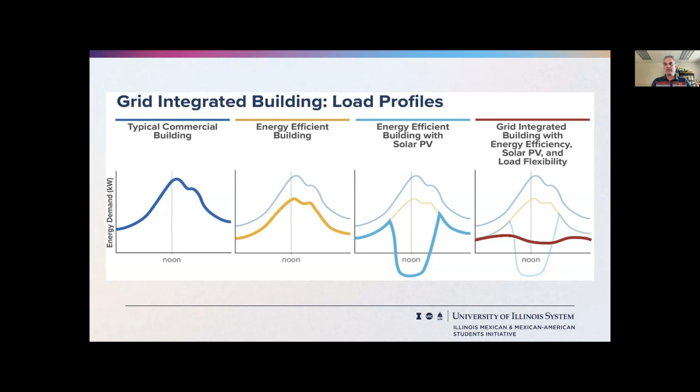So that's very efficient. These systems run 24 hours a day, 365 days a year—always running, always available. They're not impacted by storm events or outages at the surface because you're using a small amount of electricity, and you're reducing the amount of carbon generated by heating and cooling. Also, because it's underground, you're using very little space—you can put it under parking lots, buildings, soccer fields, whatever. You're not using much surface space to install these systems.

In Illinois, or in the US, the Department of Energy came out with a long-term vision for geothermal energy. They identified Illinois as a place where significant expansion could occur using ground geothermal heat pumps. So we're trying to promote the advancement in Illinois and the Midwest. Also in Mexico, there's a large source of shallow thermal energy that could be used, and the group Geo is promoting research there to use geothermal heat pumps for heating and cooling.

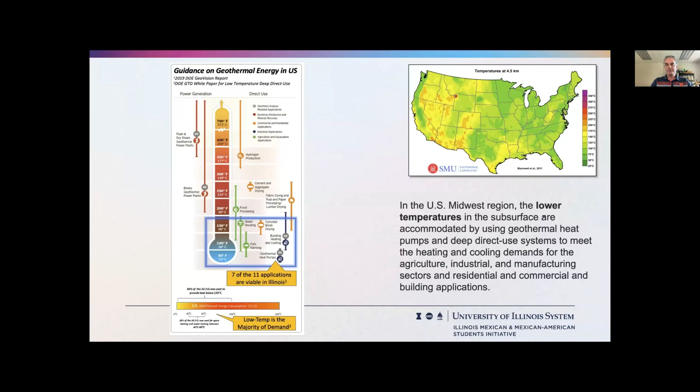Geothermal systems with heat pumps can be a number of different configurations. They can be vertical boreholes connected to a piping system and then connected to the heating and cooling system in the building. You could use, like I showed before, horizontal trenches with the pipes. You could also install a heat exchanger in a lake, pond, or river to get thermal energy that's stored at the bottom of these water bodies. Or you could use water wells to pull the water directly into the building and exchange the heat off the water, then return it back to the aquifer.

Some of the new technology actually installs the heat exchangers in the actual well, so you don't have to bring the water to the surface. You just run the water through the heat exchanger, it captures the thermal energy in the well and pulls it out into the building. Long-term, if you could do this, you could actually turn a water well into also a geothermal well and get your water and your thermal energy from the same well.

In buildings, you can actually install geothermal loops in the structural supports, the piles that are in the building structure, the foundational parts of the building. Because you're already drilling these for the structural components, it's basically free. So you install your loop inside of the cement piles, and the drilling part of it's free, which usually is about 30 to 40% of the cost of building geothermal systems. So if you can save money installing them, that's another benefit.

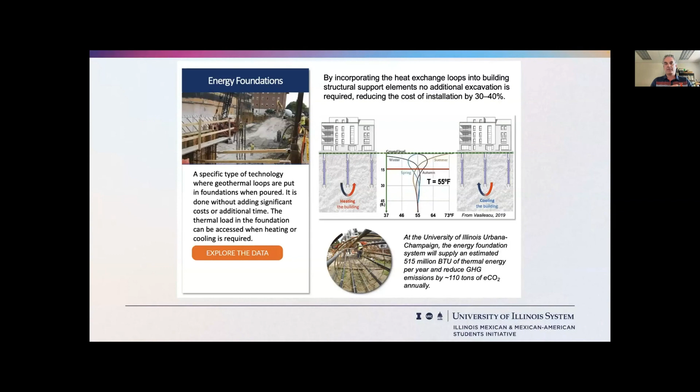The focus of some of the new research is actually connecting these geothermal wells in tandem in a circuit between buildings, so you can share thermal resources between buildings. Different types of buildings have different types of energy loads, so you can actually share the thermal energy, whether it's cooling or heating, between the buildings. This is much more efficient, and you share the actual construction cost between a number of users rather than a single home or a single building. These can be very beneficial systems in cities where you have a number of different energy uses and buildings have different energy loads.

You can see here one of the projects we're working on, we're looking at cities as a place we can develop geothermal systems. Because you have a lot of waste heat that comes from buildings, you can actually store that underground in different geologic formations to reuse later. So you're not releasing this waste energy, you're reusing it. You can actually store it underground over time.

Also, developing these geothermal systems, you're creating a whole new workforce to install these systems. So you're actually creating jobs and creating economic development with the advancement of geothermal systems.

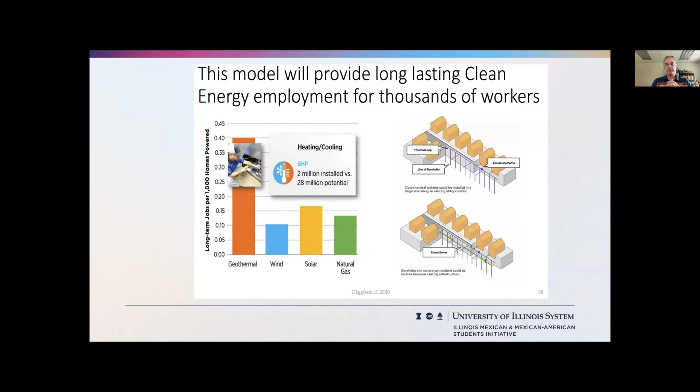And we on campus here, we were involved in several projects. This project here for the campus instructional facility, just bringing the research into the design of the systems, we were able to reduce the actual overall cost of this building's geothermal system, which was pretty significant.